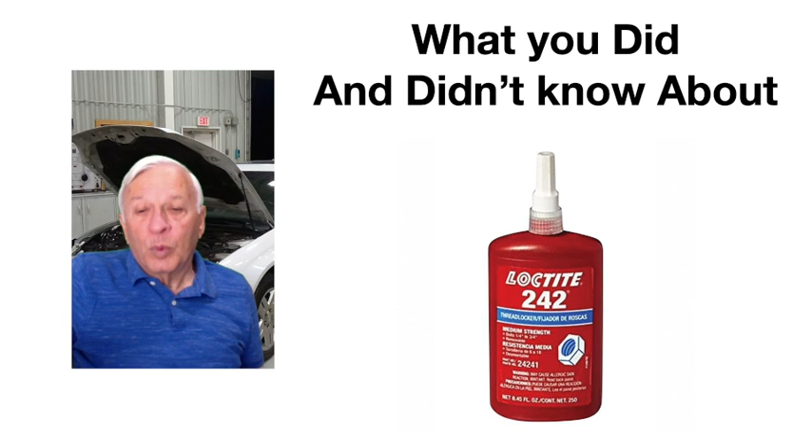Loctite is one of those products that most of us have used. Most likely when we first started working on cars, we were taking things apart and putting them back together, and in that process someone simply said, hey, don't forget to put Loctite on it. So we did, with no real instruction. Because we didn't want to stop working, and didn't want it to come apart or work loose, we just smeared some on the bolt before we installed it. Loctite is one of those products we have used without understanding what it is, how and when to properly use it, and how and when not to use it.

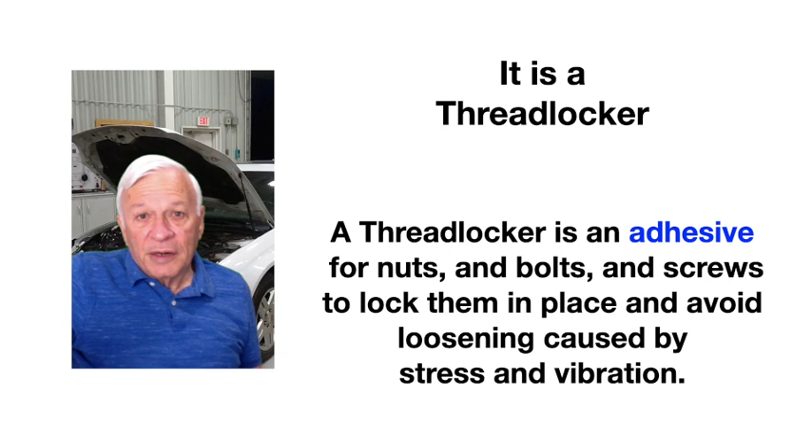With that being said, let me ask you this: is Loctite a glue? Well, no, not really. Okay, then what is it? It is a thread locker. Well again, we know that, it says it right on the package. So what is a thread locker? A thread locker is an adhesive for nuts, bolts, and screws to lock them in place and avoid loosening caused by stress and vibration.

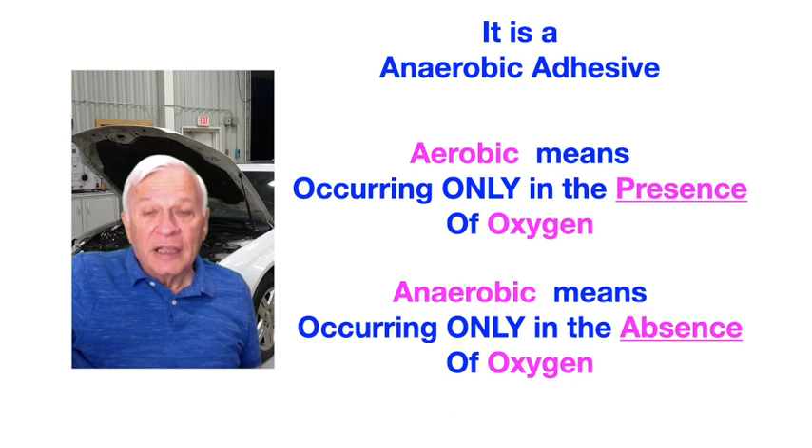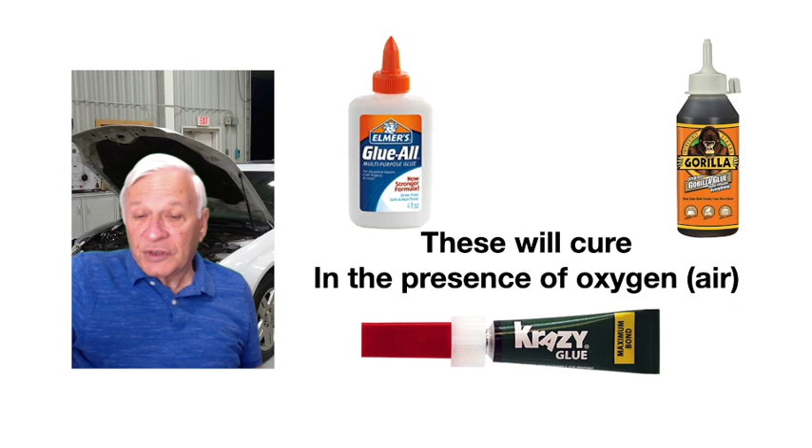But not this kind of adhesive. It is an anaerobic adhesive. So what does anaerobic really mean? Well, aerobic means occurring only in the presence of oxygen, so anaerobic means occurring only in the absence of oxygen. Because it will only cure in the absence of oxygen or air and in the presence of metallic ions, it is a chemical reaction. By contrast, these will cure in the presence of oxygen and air, and in the presence of whatever it is touching, or whatever it is not touching.

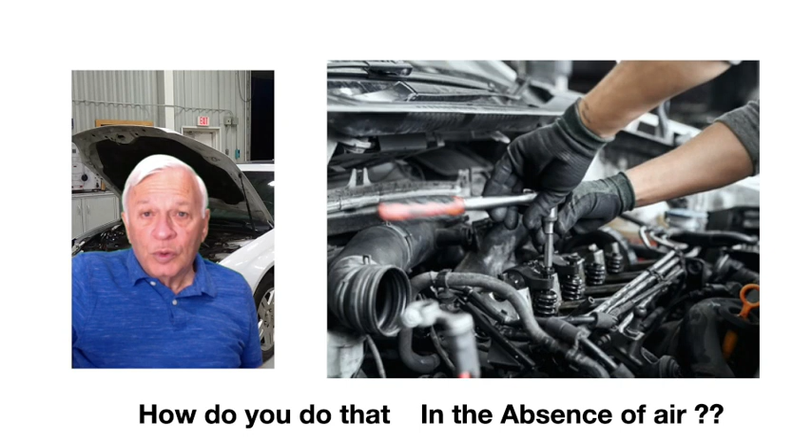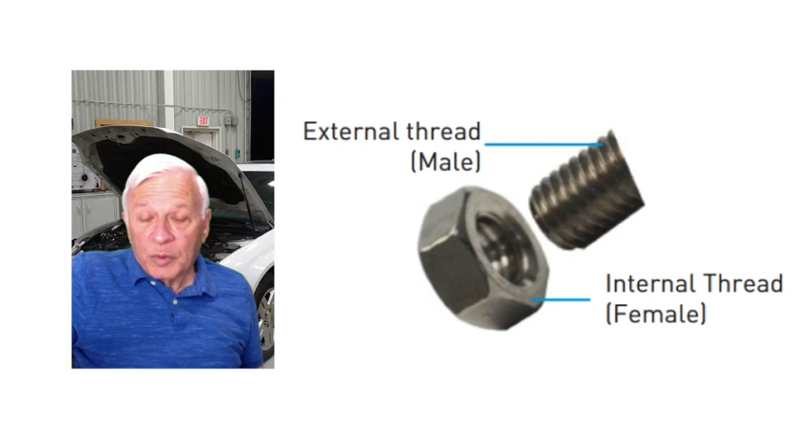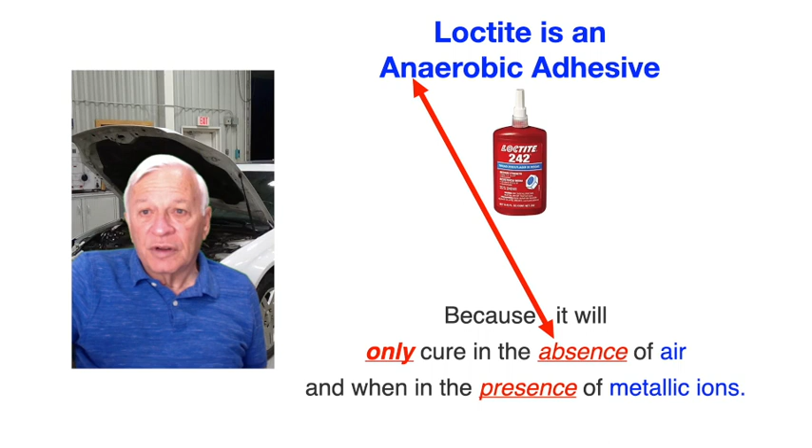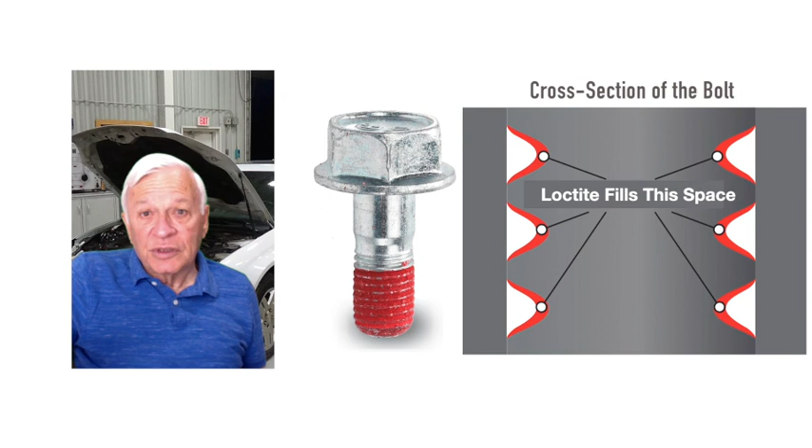So you are working and you need to install some bolts and use Loctite. How do you do that in the absence of air? Well, bolts have external male threads, and nuts, blocks, plates, brackets, etc. all have internal female threads. Once threaded together, the air is removed as the matching threads join up as the bolt and nut come together. For example, the red Loctite on this bolt takes up the space as they are threaded together. Remember, it will only cure in the absence of air and in the presence of metallic ions. Once threaded together, we now have both metallic ions and the absence of air.

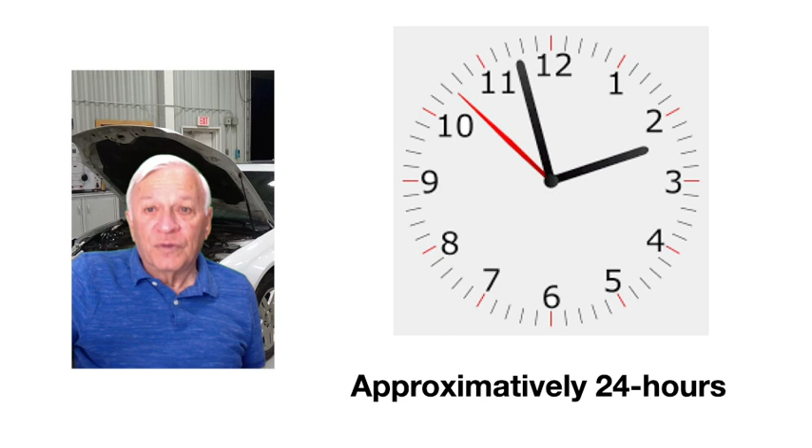So it will cure, but how long does that take? It is fast acting, but approximately 24 hours is typically needed for it to fully cure. Do we have to wait? No, the curing will begin immediately, so simply continue your work. Just don't introduce heat by starting the car until it is fully cured.

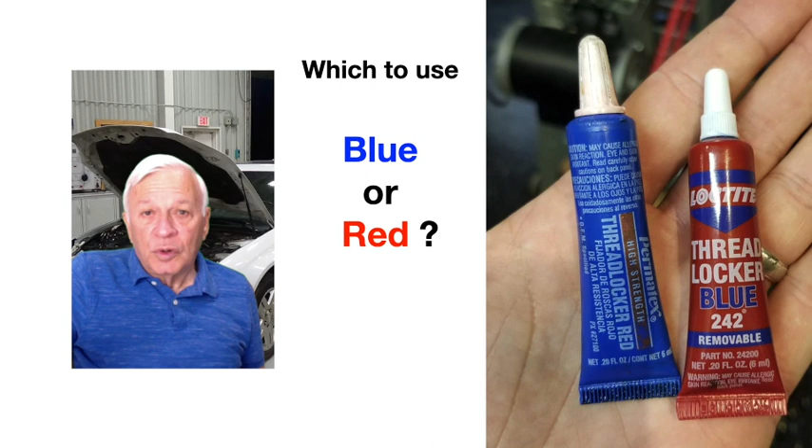So which do you use, blue or red? Well, don't make this mistake, don't go by the color of the container. You must actually read the label. Look close at these containers. The left container is colored blue, but it is really the red product, it says Permatex high strength thread locker. And the right container is colored red, but it is really the blue product, it says medium removable strength thread locker.

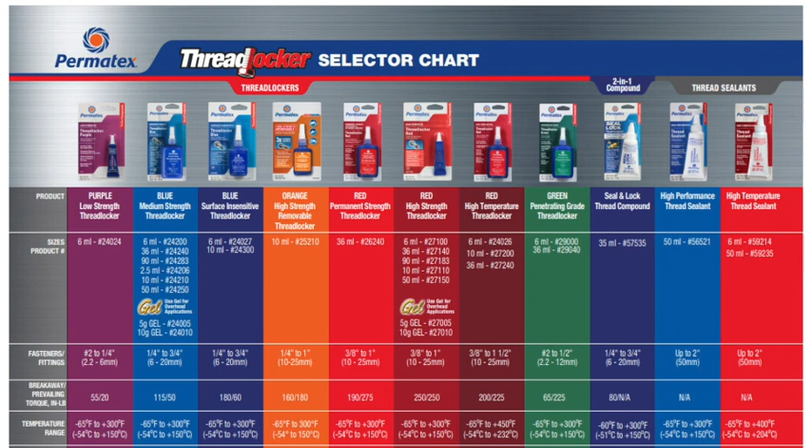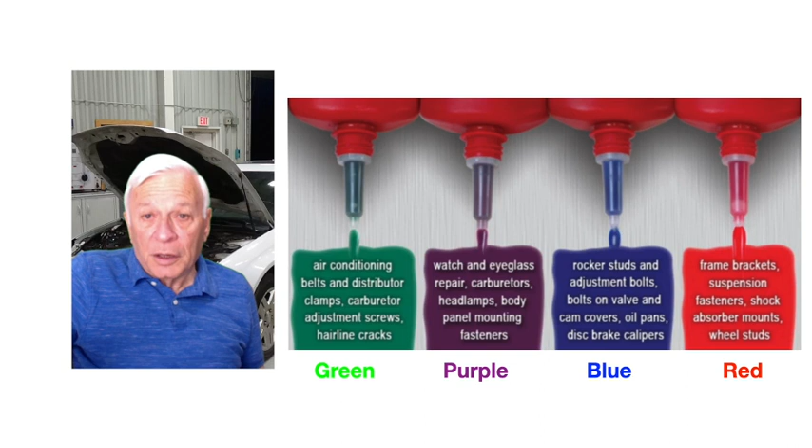So you must read the label. Each product has a suggested user's guide from low strength to high strength, and each different product is a different color. The proper use of Loctite is to clean the parts, shake it well, especially if it's been sitting around in the shop for a while, apply it to the male threads, let it set for 10 minutes before disturbing, and then let it cure for 24 hours before starting the engine.

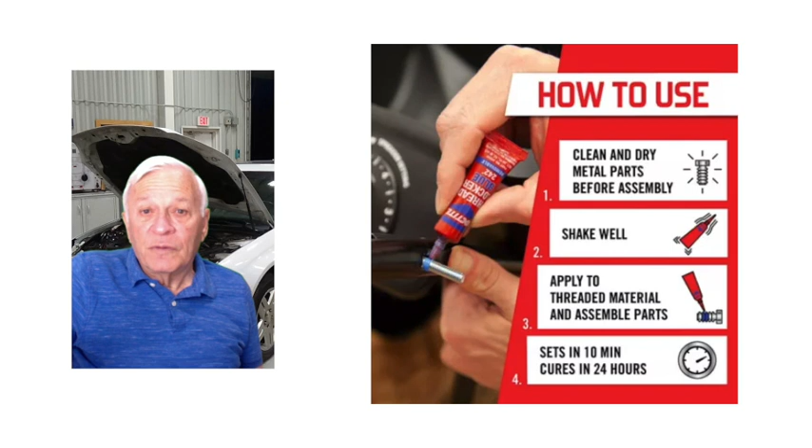Heat can affect the curing process. Apply a small amount on the male threads at the position that a nut will rest once it is screwed into place over the Loctite.

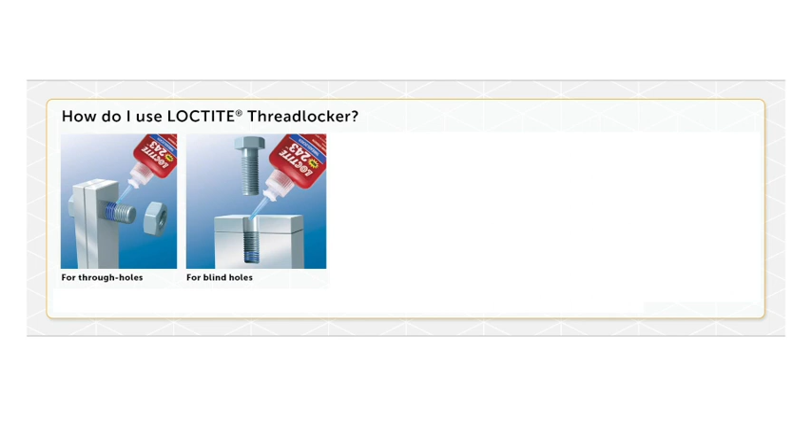Of course, there are different applications to use Loctite: bolts and nuts that have through-hole applications, bolts and nuts that have blind holes. If it's a blind hole, you put the Loctite into the hole. There are post-assembly applications, and for overhead applications, the Loctite stick is best used because liquid can run off. In some situations, the pre-applied tape is best.

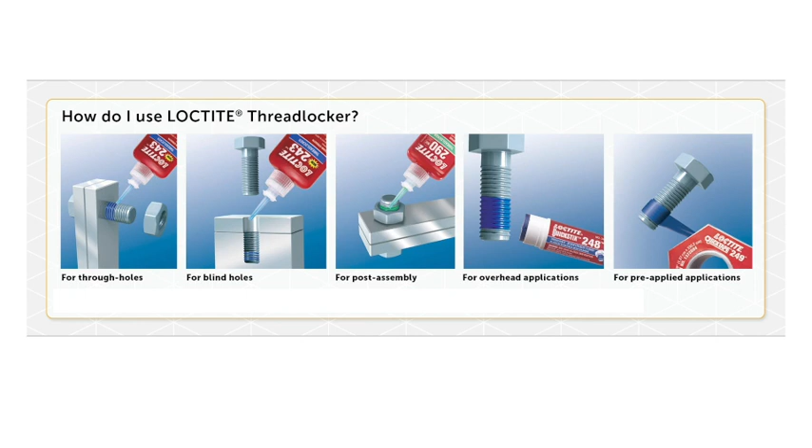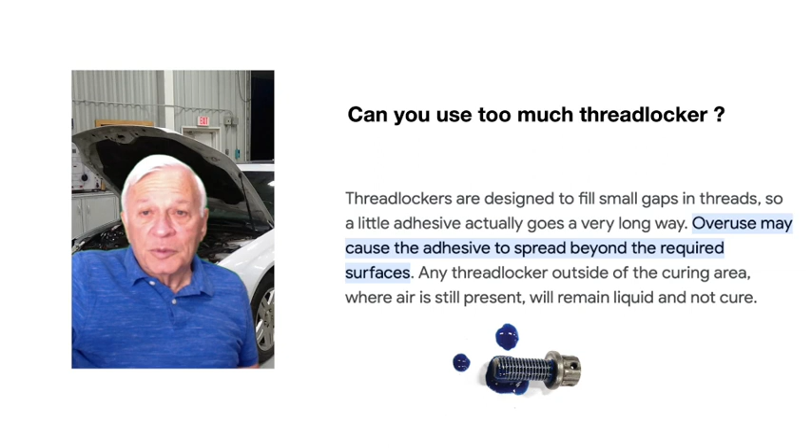So what happens if we use too much thread locker? Thread lockers are designed to fill the small gaps in threads. Too much may cause the adhesive to spread well beyond the required surfaces.

So now you know, thread lockers are needed. Just don't smear some on because someone said to. Understand the differences and how they are applied so your work will be done correctly.